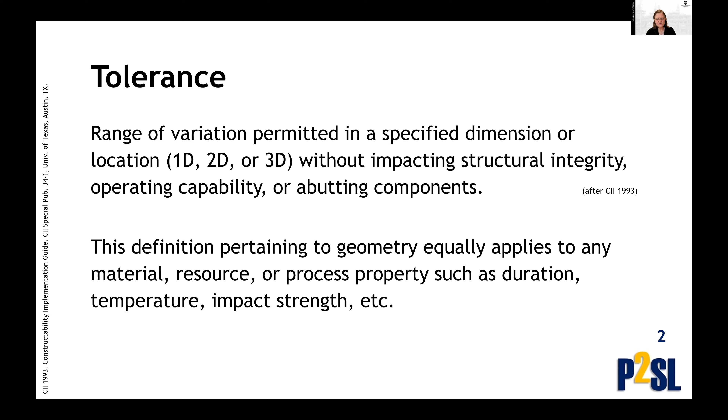With that, I'll give you a simple example of where tolerance problems manifest themselves. This was actually a case study that we did here on the retrofit of the Bay Bridge several years ago.

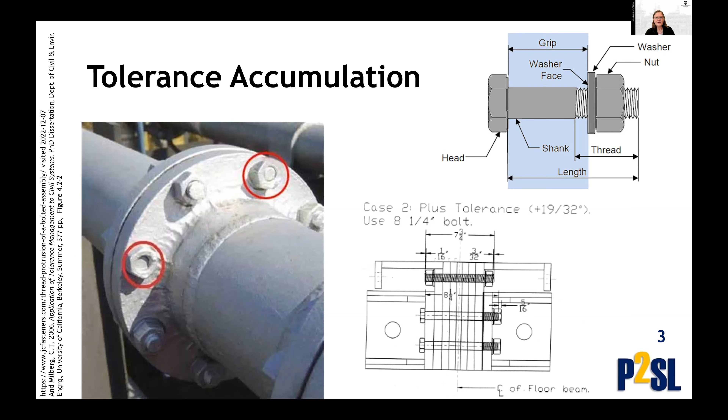So we see tolerance problems within an individual specialization. Of course, tolerance problems also occur across different specialties. Here we should talk about an important concept, which is process capability. When we do the work, we will find out that at one time we realize a product with certain dimensions.

If we repeat our process, the outcome may have slightly different dimensions. If we repeat the process again, the outcome may yet again have slightly different dimensions. And so as we repeat our process many different times, we collect all these dimensions. We can plot a histogram, like a bell curve, although the distribution doesn't have to be symmetrical around the mean.

But let's assume it is a bell-shaped distribution. The mean value is what we would call the nominal dimension of the part, and then there will be some dimensional variation around the mean. And of course, some extreme outliers are possible in exceptional circumstances.

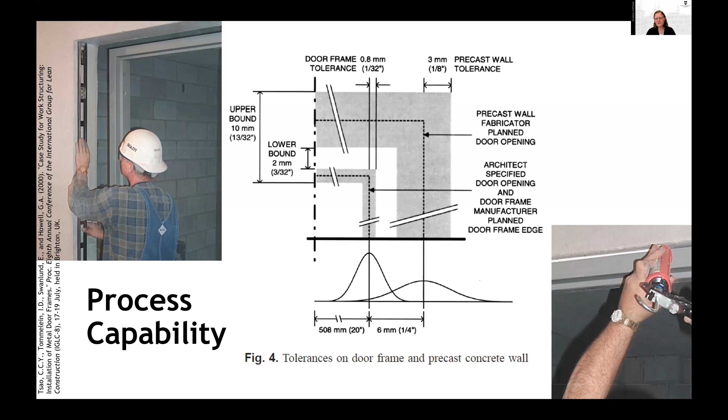To add another dimension of complexity to managing tolerances, the dimensions of products will vary over time. They vary based on environmental conditions - temperature and humidity are major influence factors. Of course, dimensions also vary during handling of the components, whether in a factory, during transportation, or during final handling for installation.

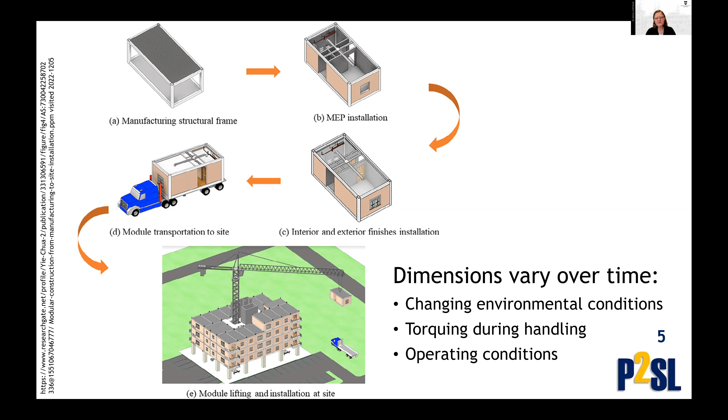And then dimensions will vary when the unit is put in operating conditions, when you have a pipe in a power plant facility. When hot fluids run through the pipe, obviously the pipe will expand, and when the plant shuts down, the pipe will cool again. So we need to allow for all that dimensional variation. It isn't just about fabrication and construction, it's also about operating the system when it's in use.

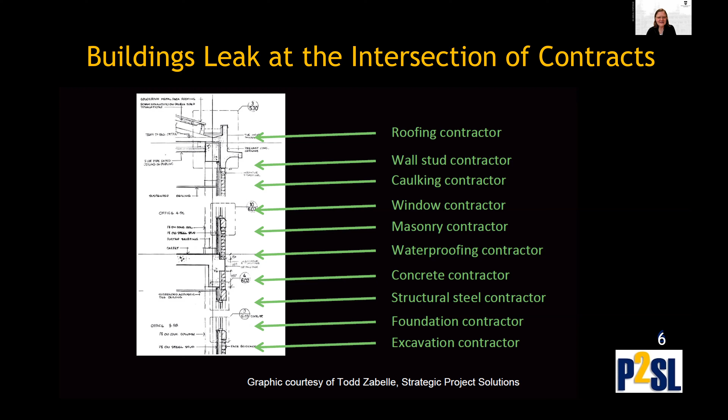About 20 years or so ago, Todd told me that buildings leak at the intersection of contracts. Unfortunately, that is still all too true today, and tolerances are a culprit. So what are the kinds of problems that we encounter, and what can we do about it?

A big problem we have is tolerance incompatibility. I already suggested the problem between fabricated parts like doors and precast concrete. But the problem is perhaps even more deeply rooted in the way we specify tolerances and the expectations we put on our project production system.

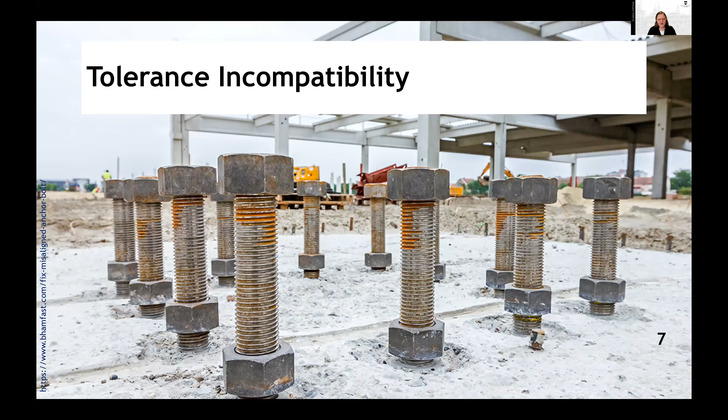Unfortunately, the tolerances are not compatible. Tolerances provided by the American Institute of Steel Construction are more restrictive than anchor bolt tolerances provided by the American Concrete Institute. This is an article that dates from 2016. The good news is that action was taken - concrete contractors, ACI and AISC got together and came to an agreement as to how they should specify the anchor bolts that are very much at the interface of their two specializations.

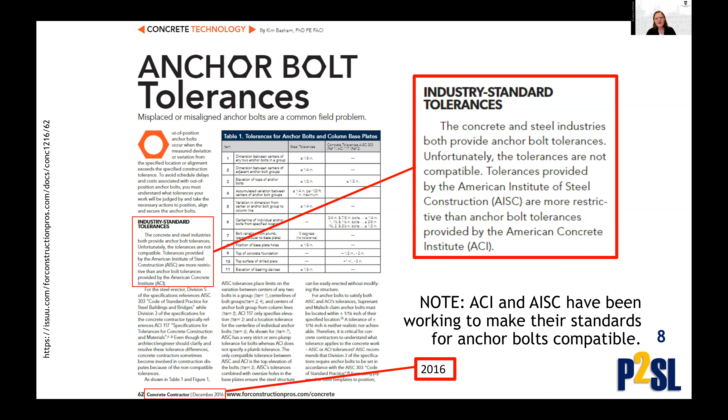A key lesson learned here is that the designer is responsible for specifying tolerances, and they need to pay very much attention to what the contractors can actually realize, because many times we find specifications are unrealistic or unnecessarily costly. So we don't want to overspecify tolerances or make them tighter than they really need to be for a system that is fit for purpose. On the contractor end, the contractor needs to have process capability, needs to be able to meet the tolerance specifications, and there are many ways to do that.

I just want to provide you one example, a practice that we call mistake proofing. Many times contractors will make some kind of a jig. They will measure the dimensions that are required and then spend a lot of time making sure that the jig is in the right location, and then they can simply replicate the use of the jig from one location to another in order to avoid that similar mistakes would be repeated over and over again.

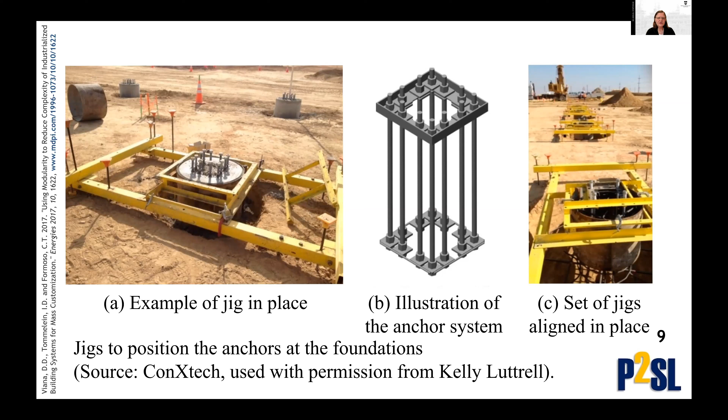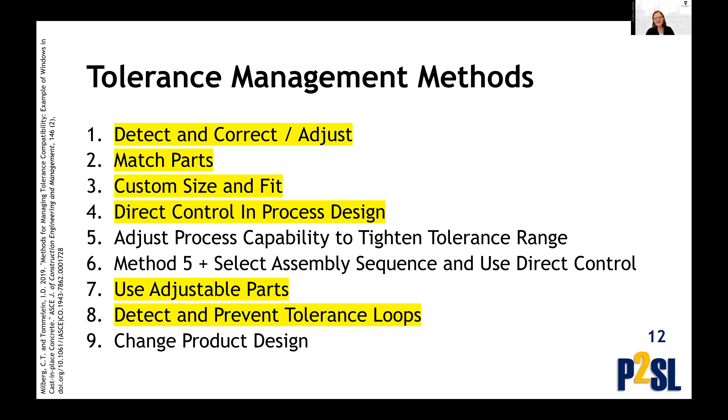Now that you have perhaps a better insight into the real importance of paying attention to tolerance management in this day and age, even though it is an old problem, I'd like to go over a couple of methods we can use. We can think of these as reactive methods, things we do after a tolerance issue has arisen, but we also have preventive methods to avoid tolerance issues from arising. We've identified 9 of these, and I'm going to highlight just a few with some graphical examples so they'll be easy to remember.

All right, windows in cast-in-place concrete, a challenging condition. It's a butt joint. Butt joints are noticeably harder to manage properly than overlapping joints, but yet we see many of them. Architects and designers often like it for aesthetics, and in this case they specify the caulk joint with very restrictive requirements: 3/8 of an inch minimum to guarantee caulking performance, and 3/4 of an inch maximum so it wouldn't look too large.

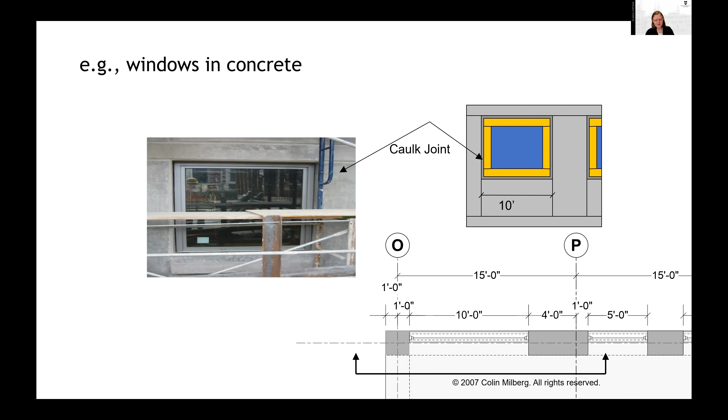So add to that the tolerance specification for the windows and the tolerance specification for cast-in-place concrete, and you appreciate this is not going to be easy to manage. Of course, what happens in the field is that a number of windows did not fit in the opening, as you can see from the field document that says the window or panel size changed, and make this work. Making this work means either you adjust the concrete—get out your grinder or patch it where needed—or you fix the window by trimming, shimming, or custom sizing and fitting, or maybe you have to do both. Those are very traditional methods used.

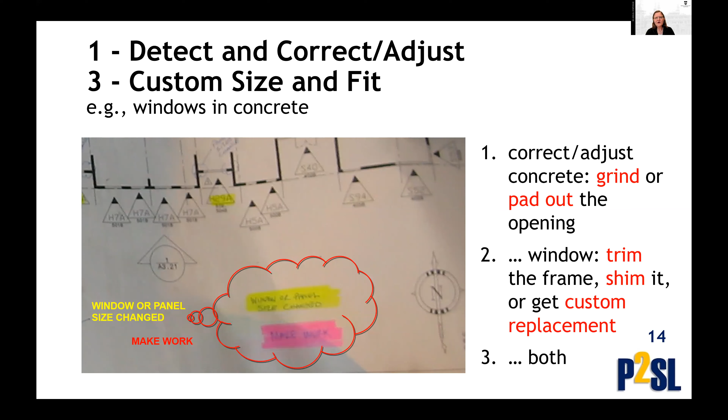Of course, on the reactive end, we have a problem now. How do we fix it? Another method is to try to figure out if parts can match.

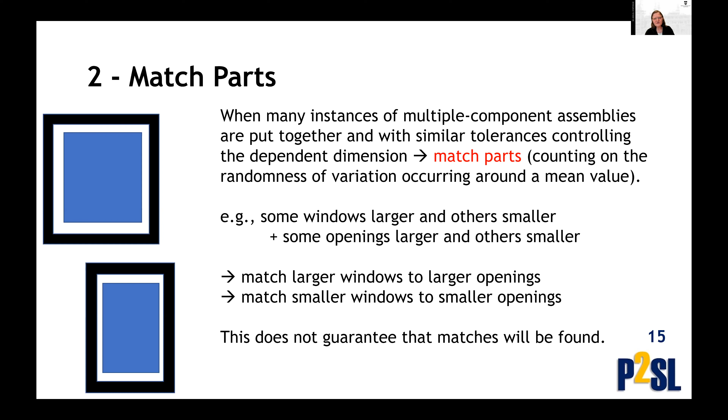If you have many openings of varying sizes and various windows of various sizes, perhaps you can identify some of the bigger openings and find some of the bigger windows to match those up, and find some of the smaller windows to put in the smaller openings. If you're lucky—there's no guarantee this will be feasible. The key thing to realize is this is very much a reactive method, and it can take an enormous amount of time to find the right matches. But matching problems are very common in our industry.

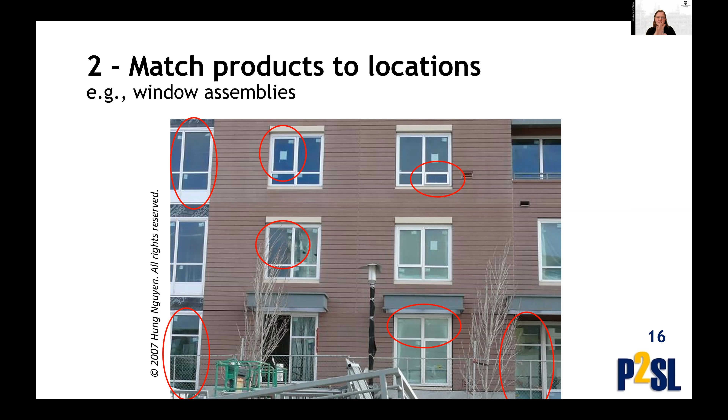I want to diverge here as an aside, to talk about not just tolerances or dimensional variation being a challenge, but also product variety. This was a picture one of my students took years ago for their course project, and in this specific setting, sure enough, they found 7 different window types. This may be useful from a functional perspective, but if you have much product variety, you have to get the right window in the right location, and there is no substitutability.

So the matching problem, simply depicted, is shown on the left-hand side. The expectation is that we have an activity delivering components 1, 2, 3 in that order, and another activity delivering components A, B, C in that order, so that at installation we can match 1 with A, 2 with B, 3 with C, and so forth. Of course, this doesn't always happen. Things get out of sequence for whatever reason, and we end up with extra inventory and a lot of time spent on site trying to find matches, and unfortunately sometimes making mistakes—getting things in the wrong location. So there's rework as well.

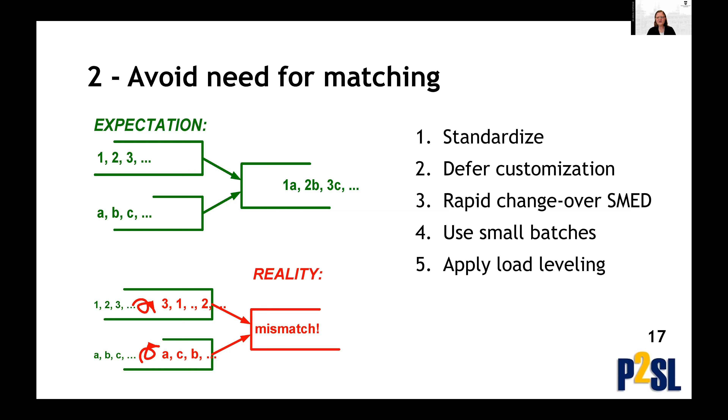There are a number of lean practices we can apply to alleviate this problem. Obviously, standardization and deferring customization—if there is less uniqueness to the components, the matching problem is alleviated. We can also allow for flexibility in the system, such as rapid changeover, or what in Lean we call single-minute exchange of a die. When that's possible, we have flexibility to move things from one location to another, switch over rapidly, work in small batches, and apply load leveling—all of which helps with the problem.

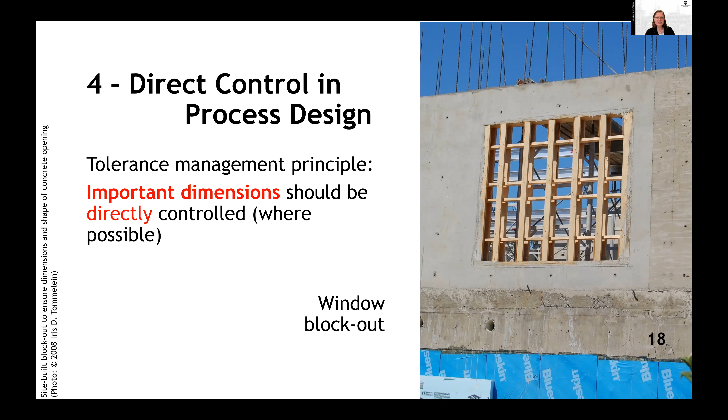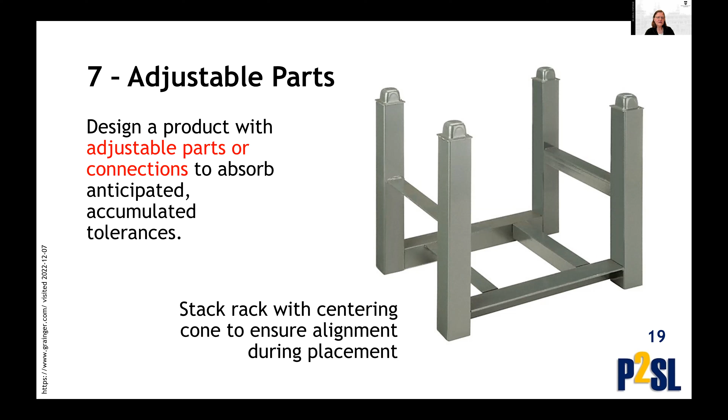Another tolerance management method is to use adjustable parts. This is very common in modular construction, where we have centering cones on individual modules, so that when the next module gets placed on top of the lower one, it is easy to create the perfect alignment between the pieces, with very little positioning measurement needed. Another very nice mistake-proofing practice.

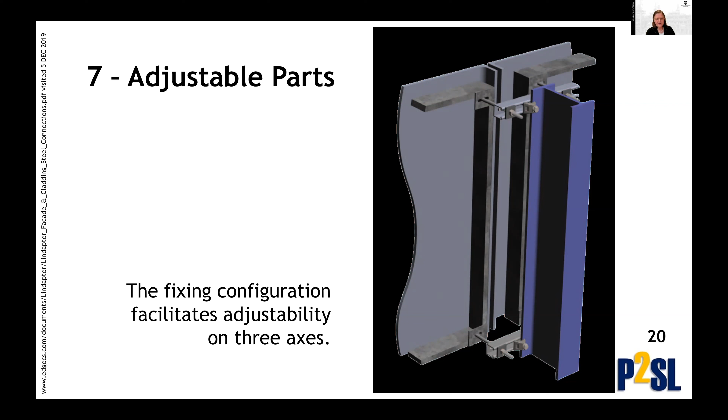Adjustable parts also come in other shapes and forms. Fixing jigs are very common, for example, to attach exterior cladding to a structural frame. This one shows three different axes of flexibility. You can make things work that way, but of course it takes time and effort to get all the coordinates of all the parts and pieces aligned in the way that will meet the performance and the product requirements.

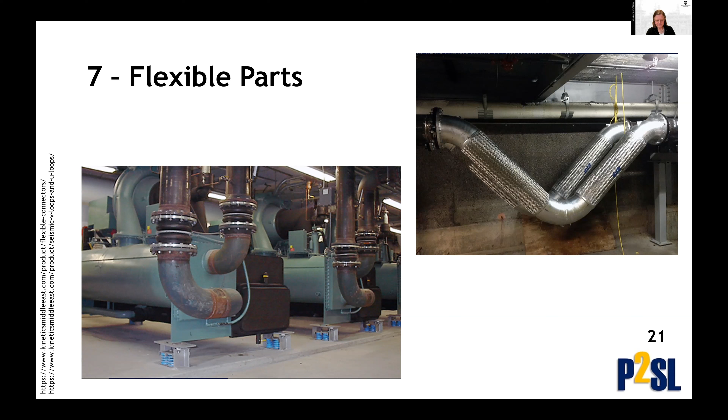Yet another example is the use of flexible parts, also very much used for long-term operation, for example in seismic conditions, as you see on the right-hand side for a seismic joint in pipe. In construction, these types of fixtures are very helpful as well, because they allow you to adjust things a little bit when the deviation is a little larger than expected.

The last method I wanted to expand on is really important as far as I'm concerned, because it very much brings us into the world of virtual design and construction, where for so many of us everything is just perfect, everything is plumb, everything is straight, everything is exactly the dimension we want it to be. And lo and behold, when we get to the field, it is unfortunately not the case that the world is so perfect, because we have this dimensional variation.

This forms what we call a tolerance loop. A tolerance loop is: if we start from the center line of, let's say, the left column, we walk to the right 1 foot, we walk to the right 10 feet, we walk to the right 4 feet, and we return 15 feet, we come back to the same place. Every time you have a tolerance loop, you know you have a tolerance problem.

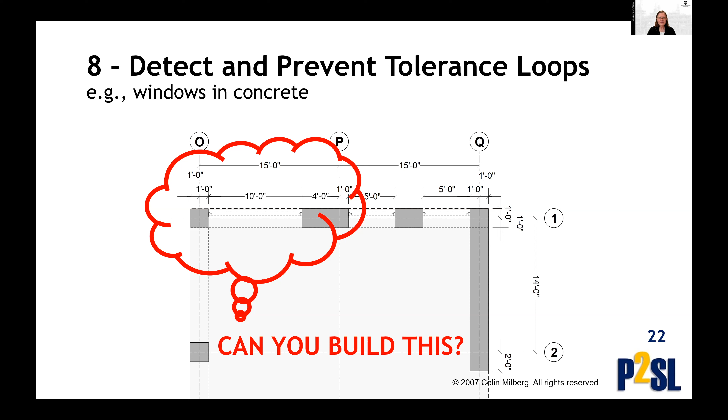So what can you do about this? To give you one simple example, you don't close the loop. In this example, you see 1 foot and then 5 feet for the window, and then no dimension specified for the concrete in between the two windows. This gives an indication that perhaps that dimension could be used to absorb some of the dimensional variation that will occur as you try to build as close as possible to meet the other dimensions given in the system.

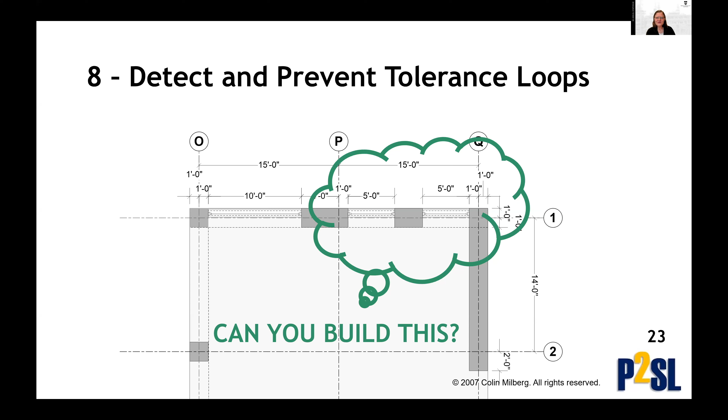So we can communicate in design drawings and specifications what our intent is as to which dimensions really matter, like the window dimensions, and then make sure that you cast the concrete so that the windows will fit. Right, so keeping this short, coming back to the framework I presented with reactive methods and preventive methods.

I mentioned we have 9 methods identified that are commonly used in tolerance management. I've expanded on a few. Some of these methods, the ones I started with, are the reactive methods. You leave it to the field to figure out how to make do, how to actually fix the problems that have been created upstream in the production system.

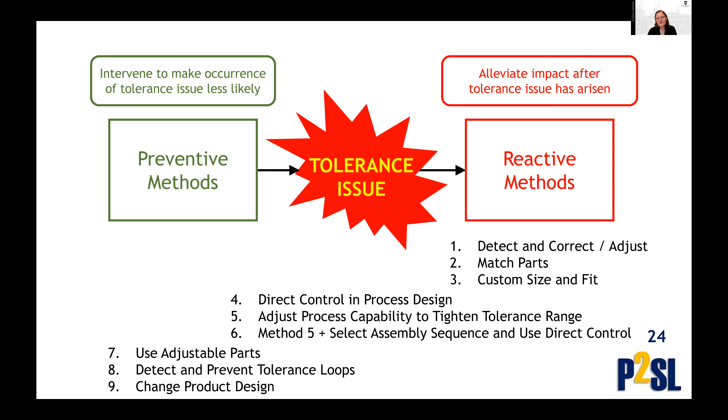Ultimately, these methods work, but they are also very costly to use. And therefore, the argument is maybe designers and builders together need to better understand what methods are available upstream that they can use, and be preventive in preventing tolerance issues from arising. So a quick recap.

A big question that should come up is who specifies the tolerances, who does the work to meet them, and who inspects, as we saw in the bridge bolts case. We need to coordinate and manage intra-trade and inter-trade tolerances.

I talked about what I call the BIM illusion. Nothing is, in fact, exact when you get to the field. We don't want to dimension everything with deterministic values, even though that's only a mouse click away on your virtual design models. And we should not be over specifying tolerances.

It's easy for designers to think that if they have tighter tolerances, it will be easier for field execution to match parts. But the reality is tighter tolerances also demand certain process capability of the builders, and the builders may or may not have that process capability.

So the real question is, what tolerance values will result in acceptable performance? And then to match that, how capable is your construction process? What can you do and what does it cost? Tighter tolerances may cost more money, but they don't necessarily have to cost more money.

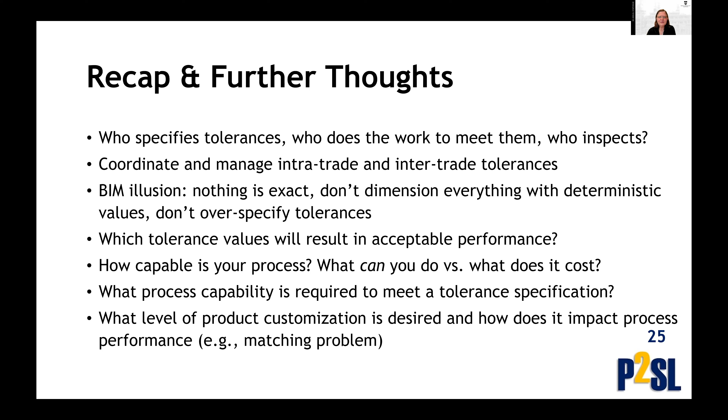I hope that you now will add tolerances to your list of vocabulary as concerns to address, again, as we move to offsite fabrication and are changing the world of designing and making. So with that, I'll pass it back to James and see if you have any questions.

Thank you, Iris, for that provoking presentation. And one thing that's actually interesting is, as you said, you've been working on this for a very, very long time. There's numerous examples you've accumulated over the years that we only saw a glimpse of.

But one of the things you just pointed out is that as more and more work is moved off-site, the chances of these issues occurring is not only at one work phase, but now two work phases, where it could be happening in the pre-assembly area as well as the installation. And the spatial

tolerances that you touched on actually have huge implications. But as the products become more unique, once it gets pre-assembled, it has to go into specific locations, right? So can you tell us a little bit about what you see happening in terms of the temporal tolerances as work moves more off-site? How does the matching problem actually play out?

Yeah, well, the matching problem. So I've looked at a couple of projects in San Francisco of multi-unit residential housing. Typically we have a concrete podium of one or two stories that is built on site, and then we have these modules that need to be mounted on them. That interface between the modules and the concrete podium in situ is something that's certainly worth studying a little bit more and maybe standardizing on.